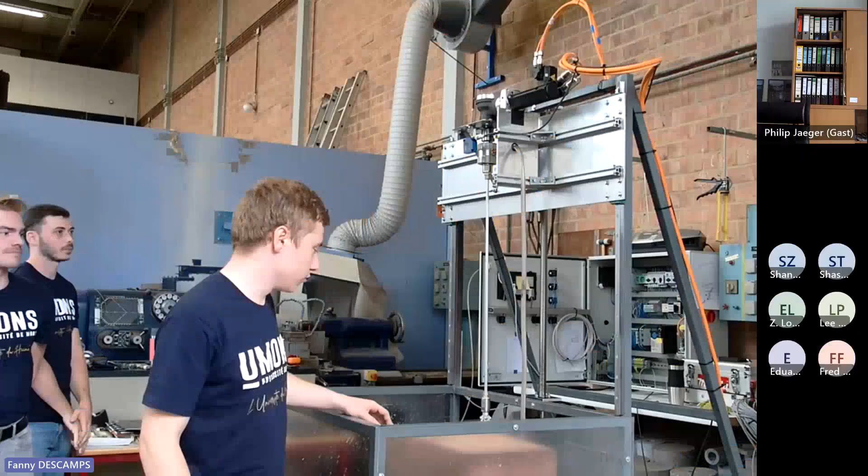Hello everybody, we will show you our rig. So we have the structure, it's in steel. Then we have here the rock. We use a tank for water. We work with saved water all the time.

We do this for saving the planet, and water is important for us, so we don't want to waste it. We reuse it with a pump that we can adjust to control how much water we put into the forage. Just here we have the swivel train with the tool, DDS, an enterprise in Belgium, in Charleroi, next to our university. Here we have the swivel for putting water into the rig.

Here we have the motor, we use a servo motor. Then we have the reductor, gearbox there, and it's the swing train for adjusting and going up or down. We have a ball screw, that we designed ourselves, and on the ball screw we have also our servo motor. We have two servo motors, so with them we can have all the information - the torque, speed of the tool, and other things.

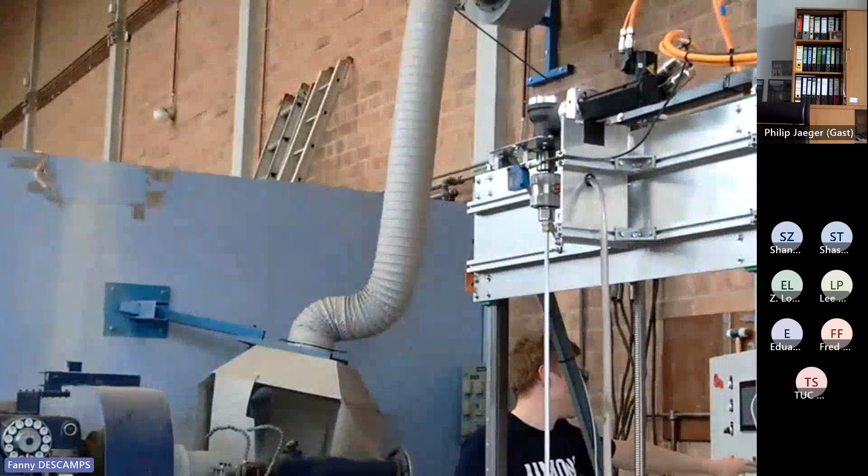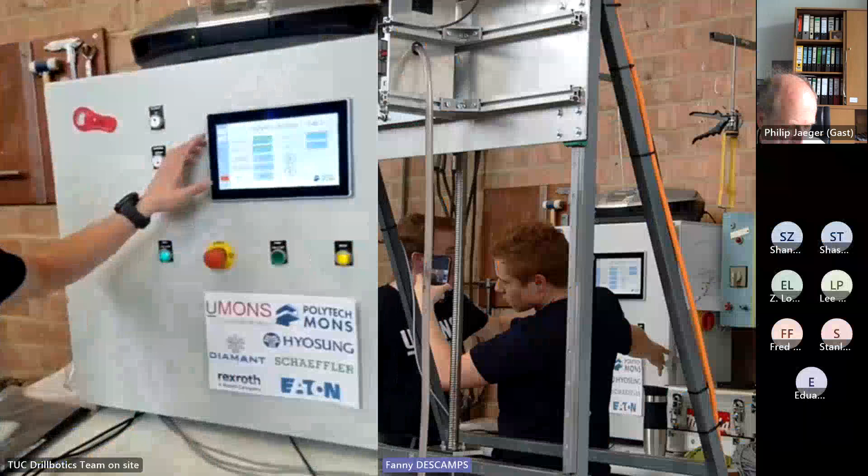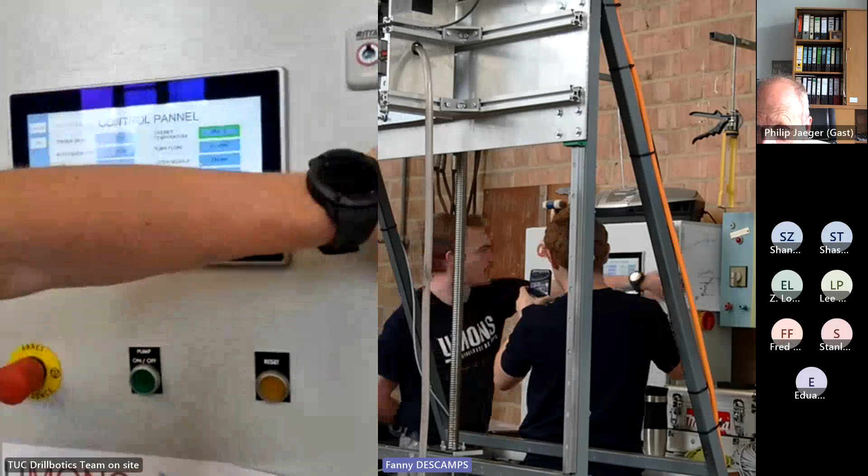We have taken some characteristic values between the ROP and the weight on bit. That permits us to optimize the regulation loop, which is PI.

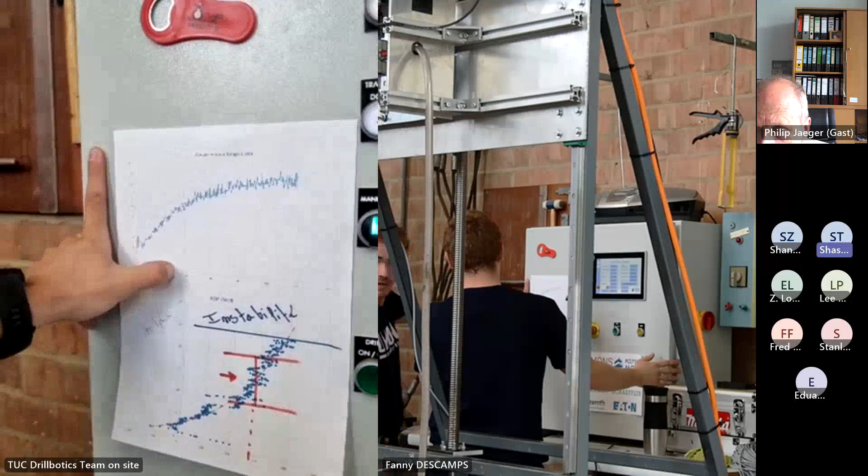On this sheet, we can see that we have chosen to use... One, Hey Martin, it's hard to hear you. Excuse me, you're a long way from the microphone. Maybe take the sheet to the microphone. Do I need to repeat a lot of things? What didn't you understand?

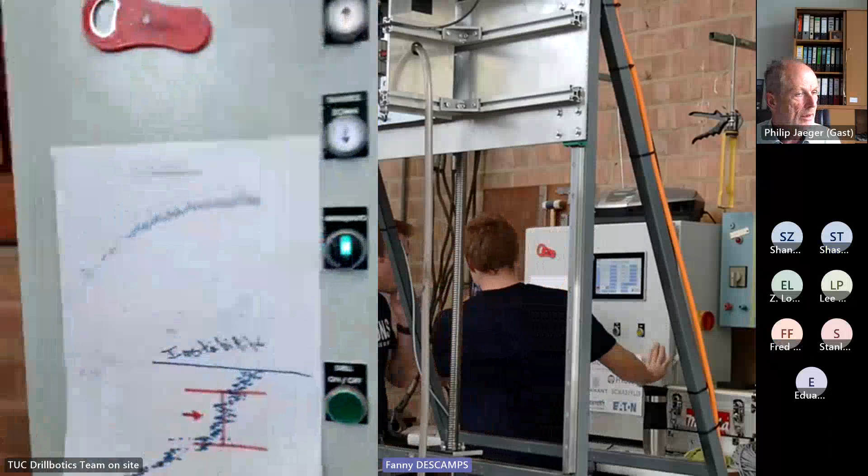We couldn't hear you. On the sheet, you will find some characteristic values that we have taken from a precedent drilling process, the characteristic between the ROP and the weight on bit, so we can see how to stay in a safety area, not to be unstable with the pipe.

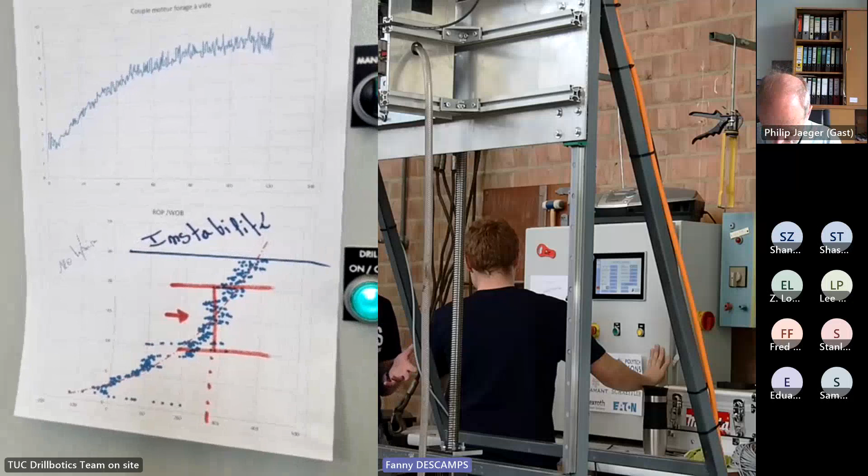We will set the ROP at 15 millimeters per minute. We can see here that this is the interval where we will work, and the PI regulation will try to command a precise weight on bit. So with this weight on bit, we will control the weight on bit by regulating the ROP. That's the way it works.

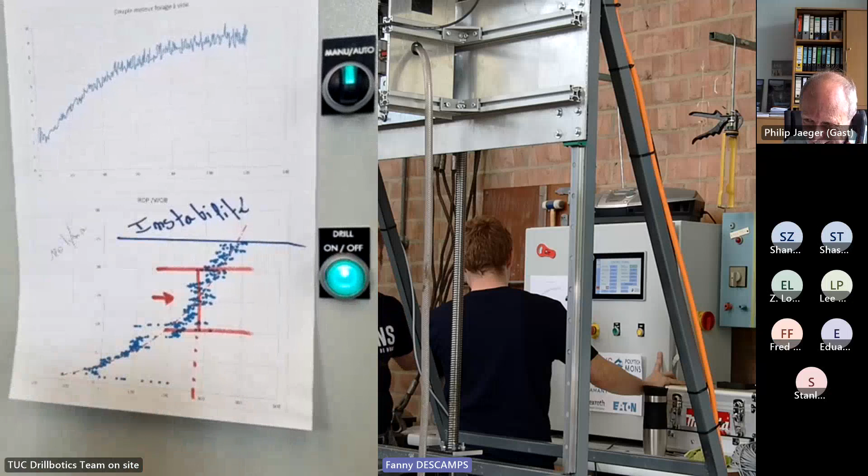And this is for a rotation speed of the bits of 120 RPM. We have chosen this speed because the PDC bits have been glued and not melted onto the bits, so we cannot rotate it too fast.

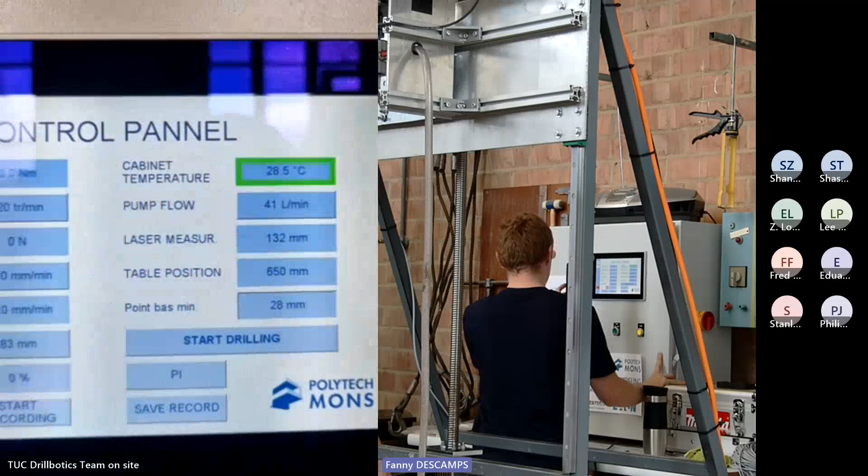Question: so you're holding RPM constant, but you're changing weight on bit to target the optimal ROP? Yes, the rotation speed is constant, and we are looking for a precise weight on bit by controlling the ROP. That's the way the regulation loop works. So it's an ROP control.

And how did you define instability, or how did you find that region? We found that region by empirical tests. We tested the bit, and with the pipe that we have, which is quite thin, we increased the ROP until it almost failed, so of course we stayed in a safety zone. We calculated some extreme values that we always stay behind, taking care of the safety of the user, but also of the motors present in the train.

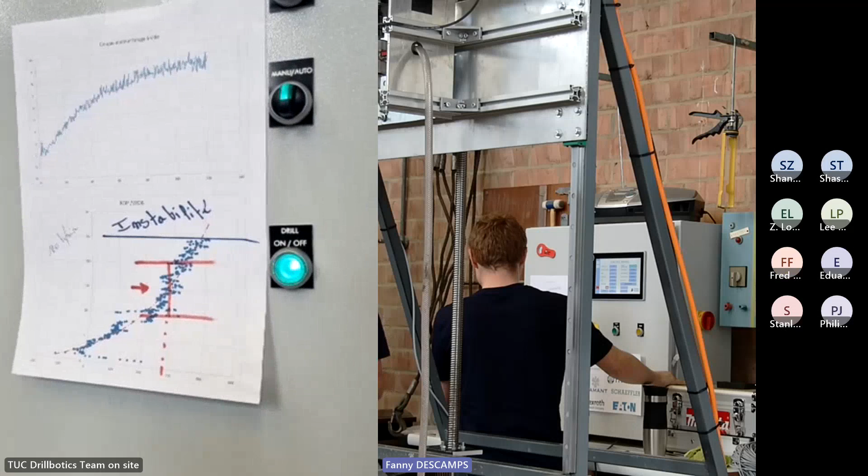With this experimentation, we have chosen this region to stay in. We could go faster, but we want to stay in a safety zone, so we don't want to go too fast and have problems.

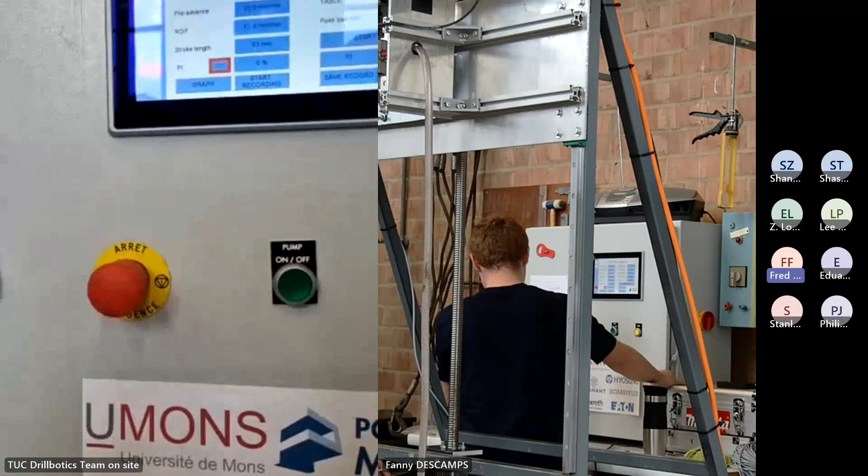I see that there's a red button on the front of the panel and a red switch on the side. What do they do? There's the red button, and when you push that button, what happens? It's the emergency button.

If you push it, the drilling motor stops and the hoisting system stops, but you're still able to move the hoisting system so you can take your bit out of the rock. This has been programmed in the PLC software. Does it disconnect the power? It disconnects the power of the motor, but not of the drive.

Since we can program the way we want the emergency button to work, we wanted to still be able to control the positioning of the bit, but not to be able to drill anymore.

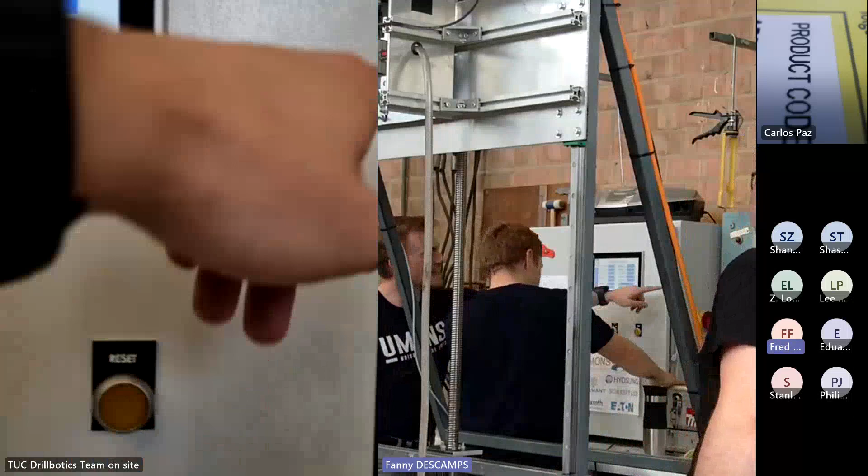And then on the side of the panel, is that switch a power switch? On the side of the electrical cabinet. Does that disconnect power? Yes, this is the switch for the power at the input of the electrical box. It is 400 volts, three-phased.

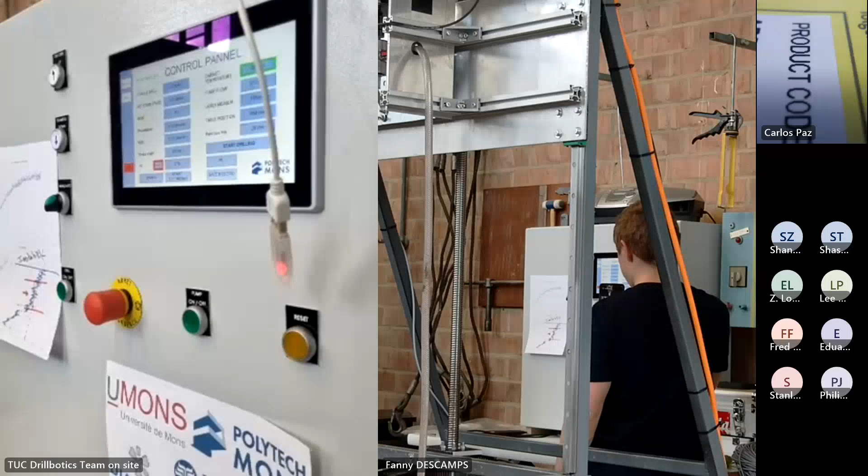Because the button on the front is not going to protect you from an electrical shock, if you had an electrical problem, the only place to turn it off is on the side of the box, not the front. Yes, of course, if we are still able to move the table, we can have an electrical shock. But the system has been sized for the safety of the user next to the rig, not next to the electrical cabinets.

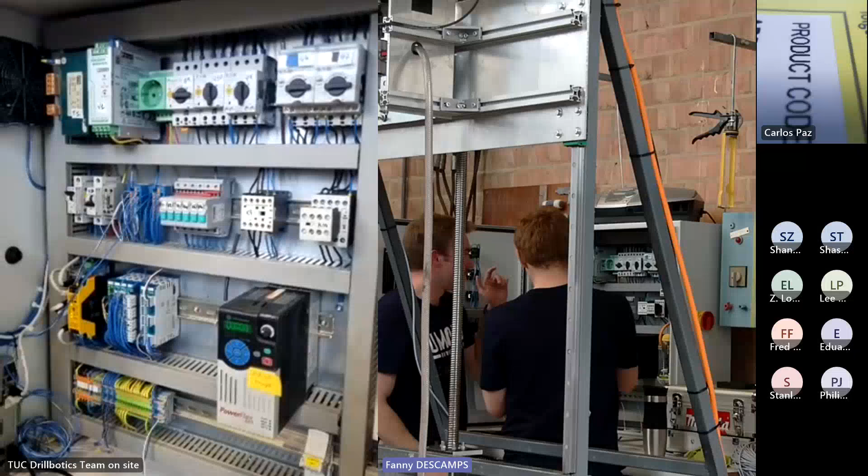If you have a ground fault, is there a ground fault interrupter? We have all kinds of software and hardware protection. Inside the electrical cabinet, you will see particularly some magnetothermal protection to the drives, to the motor and the pump drives.

Otherwise, there are some other kinds of protection. Are those PLCs on the right-hand side? On the right side, so these are the drives that control the motors. This is the drive that controls the pump.

Do you use a programmable logic controller, or do you just control it with the laptop? We run it with a PLC software. And the PLC software, where's the PLC itself? The PLC is the software, so we use Codesys software to program the drives.

So where is your algorithm running, your ROP control? The control algorithm for controlling the ROP and the weight on bit, where is that running? In the PLC, or do you have a laptop connected to it? Well, we can control it from our laptop, but we have a PLC, so we are not obligated to connect our laptop to control the rig. The system is made so that you can control the rig only by using the display on the front of the electrical cabinet.

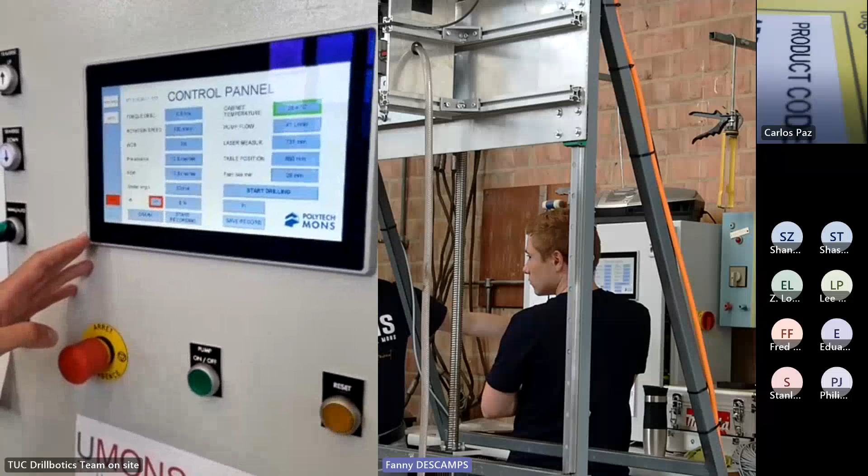A lot of the rigs now are moving to a remote control system, where you can control multiple rigs from a centralized location. Did you look at any ability to control this from a separate location, or does everything have to be controlled through this panel? We are able to control from a different site. We can connect with our computer with the proper material that we have, but we haven't installed it yet. But we could do that, yes.

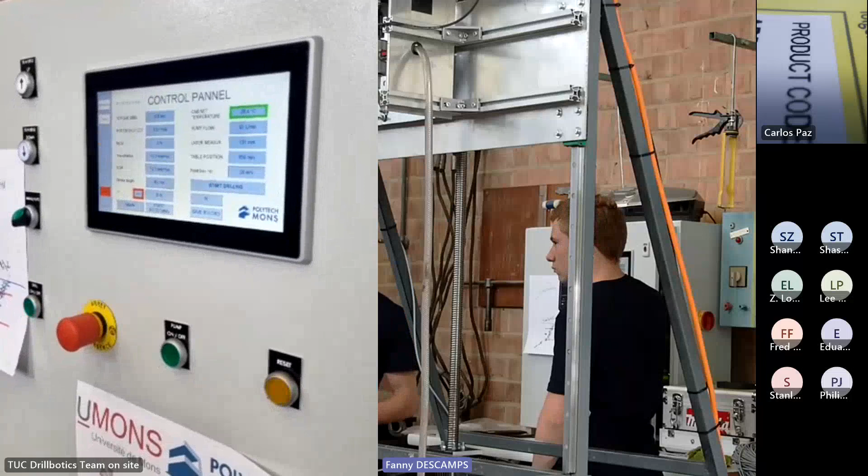Martin, can you talk about the BHA itself? What does the steering unit look like, the sensors? Well, remember this is the first year that we participate, and we haven't had time yet to create the steering system, so it's a straight drilling process.

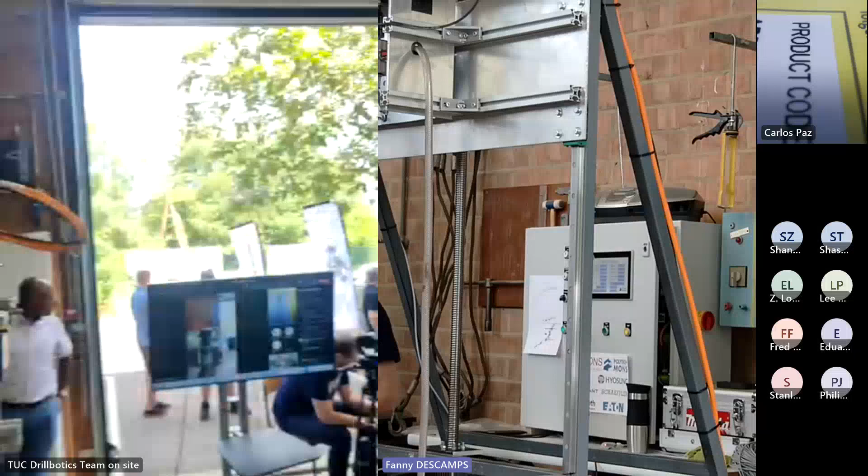About the sensors, we have chosen to use servo type motors to collect output information from these motors. This information gives us an indication of torque and rotation speed. For the hoisting system, we use the rotation speed of the motor to control the speed of the table going up or down, and the torque of this motor to know the weight on bit. Concerning the drilling motor, the rotation speed is direct information integrated to have a curve we can read on the display. We collect all information from these motors, and the torque of the drilling motor is also direct information from the motor.

A question: you mentioned torque is a direct measurement. Do you have a strain gauge, or are you measuring it from the current and calculating the torque? The servo motor works by collecting information from the voltage and current that goes through it. Well, of course it's a bit more complex than this, but typically yes.

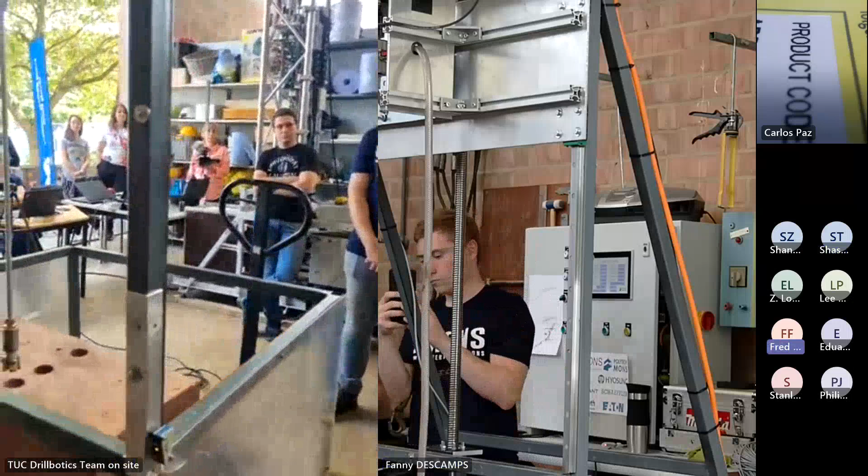What about any downhole sensor? On the torque measurement, is that coming from the servo motor and then you're calculating torque, or are you getting torque from the drive? Are you measuring the current and voltage at the servo motor and calculating torque, or are you getting an output from the drive itself that gives you a torque output?

It's the drive that controls the motor by collecting information, and we read these informations on the drive. Okay, got it, thank you.

Do you have any sensors in the BHA to measure inclination or azimuth or the position of the bit? No, we don't have sensors on the bit or on the BHA. All the information that we collect from the drilling process is from the motors. That's the reason why we have chosen to use servo motors, for the advantages of simplicity.

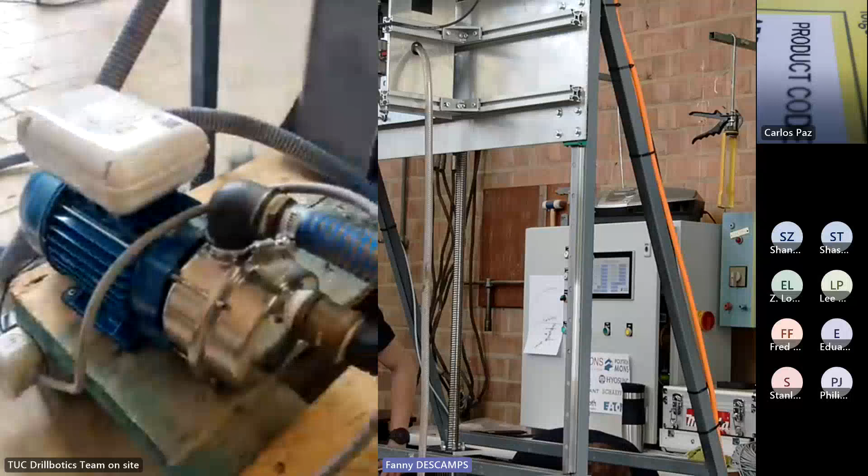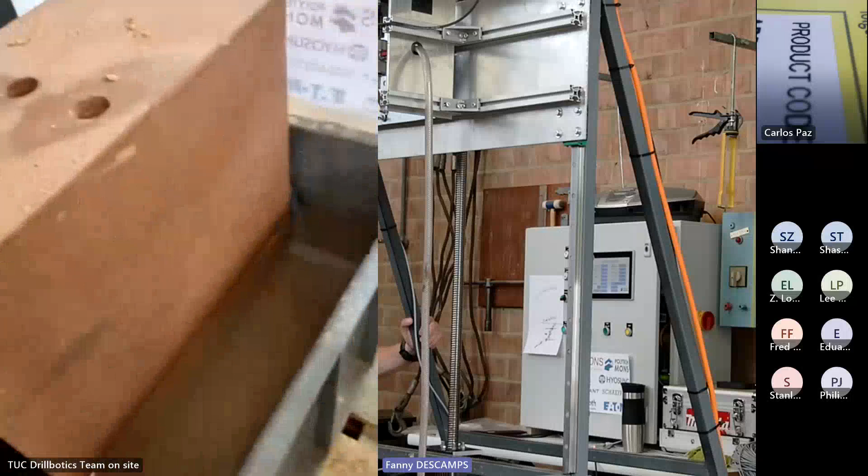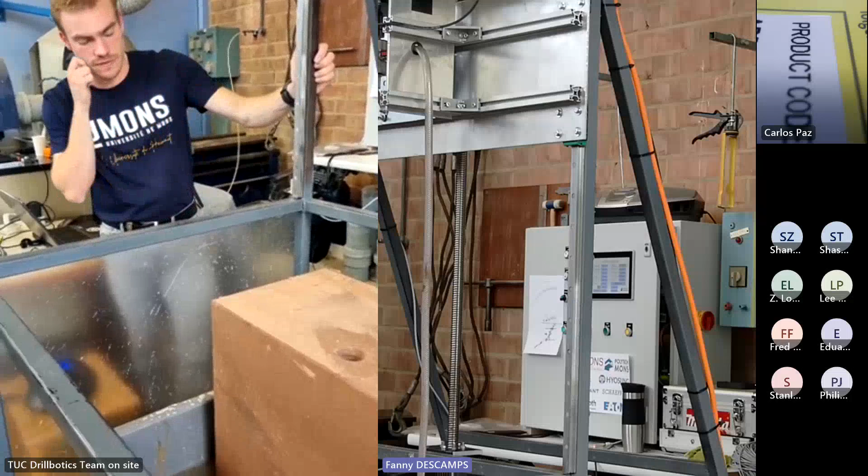Can you talk about the hydraulic loop? How is the fluid going to the bit? For the fluid, we use a flow regulated pump. So the pump drives the water through the system. It goes in the pipe, and the wastewater goes up in the hole, falls into the recipient in the batch, and there is a filter that we use to collect the wastewater, so there is no dirt that goes back into the pipe and into the process.

Can you show us the filter? Yeah, please, can you do that for me? Okay, all right, thanks.

I have no other questions. This looks good, team, for the first year. Looking forward to getting this thing running and seeing how it drills.

I'll pass it quick on to the other judges. Real quick - you said you don't have any sensors down in the BHA, no magnetometers, no accelerometers. How are you getting your survey position as you're drilling?

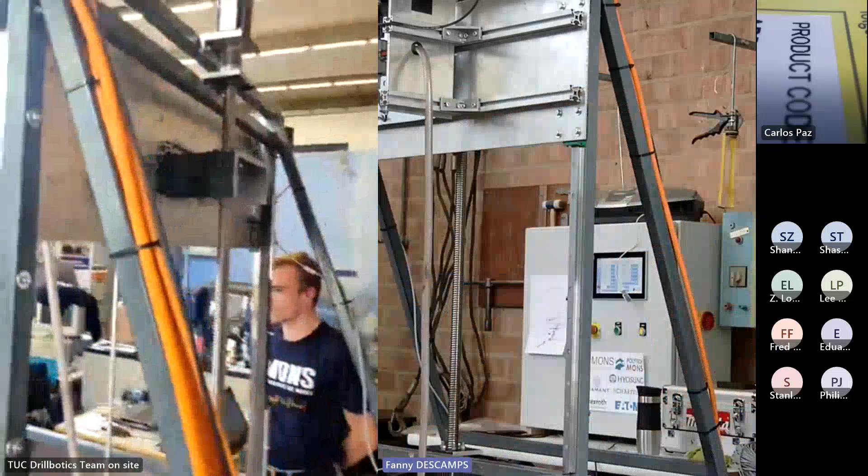By using the ball screw, because if you couple the ball screw with a known rotation speed and controllable rotation speed of the servo motor, you will be able to control the position of the bit inside the rock.

However, you have an error factor, because the pipe is flexible, and maybe we lose several millimeters by the bend of the pipe. It's not controllable for us - we can't know what this loss of distance is.

Okay, and then what's the survey frequency? I guess survey, quote unquote, frequency that you're taking - is it by the millimeter? Is it by the second? What's your positional survey frequency? I guess I would say...

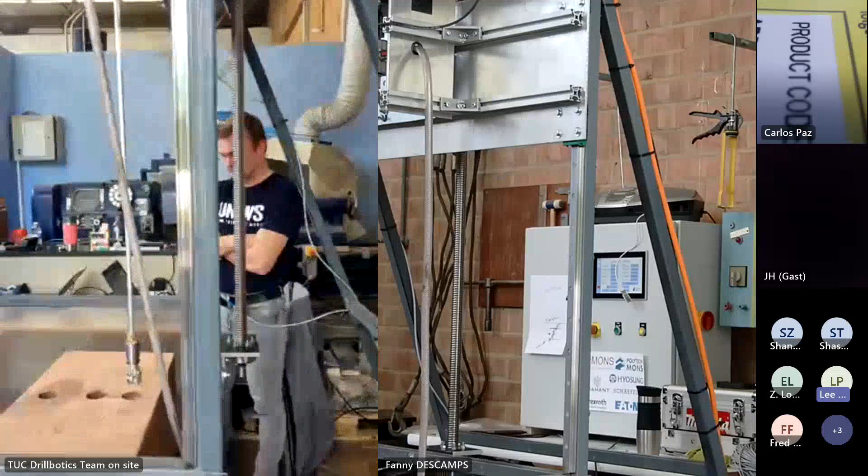Well, we take information real time. I need to check the documentation of the drives - I don't know it offhand.

Probably every couple seconds or something. No, it's faster than this. Okay, cool.

Regarding the twisting of the drill pipe, you mentioned that you use a titanium alloy to overcome the twisting problem of the drill pipe. Are you still using that, or did you change the drill pipe material, or what kind of adjustments do you make to prevent that?

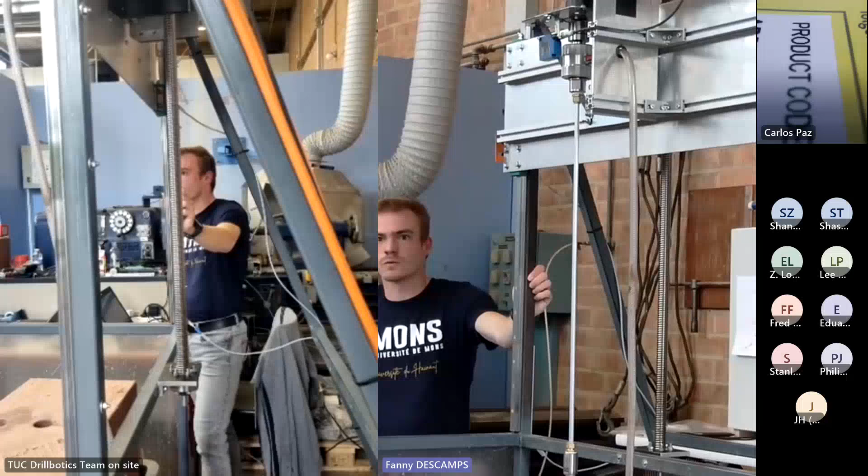We have sized the forces that are going to be applied on the bit, and we went with a standard of the pipe. The pipe has standardized dimensions, and then we calculated forces like the torque or the weight on bit that would be applied on the bit. We haven't yet changed the material of the pipe, but what we have done is put limits on the software to avoid these kinds of problems.

Got it, thanks. Regarding the testing you made to check the motor conditions, how do you measure the vertical and horizontal force? Can you walk us through that test? What kind of information do you want to have - how do you actually measure the vertical and horizontal forces on the motor when you estimated the parameters to implement in the software?

Yes, you mentioned there is an efficiency region of 450 to 500 newtons, and you also have the horizontal and vertical forces in there, and I just wanted to make sure I knew how you actually measure those forces.

Okay, so what we did is we made some tests on another bench test. We calculated forces that were applied on the cutter. Then we put a high security factor to be sure that the speed of the test wouldn't be a problem - a problem of converting these values from a low speed test to a high speed test, which is the drilling process that we have here.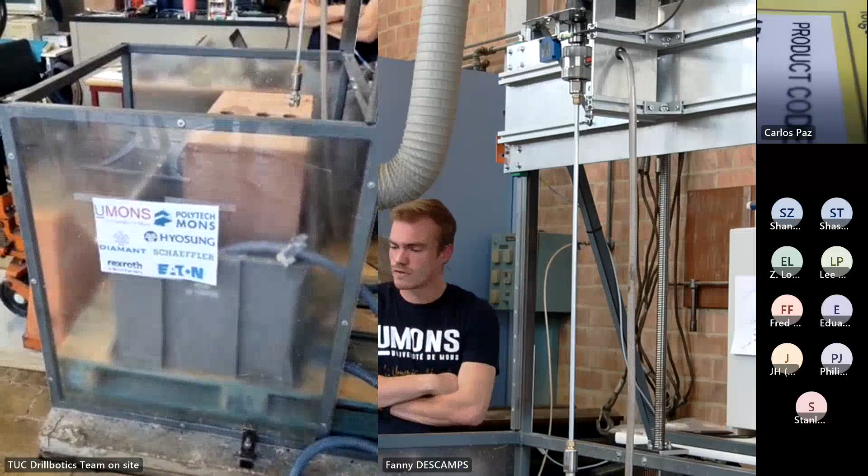Concerning the plexiglass plates, well, we put the plexiglass plates for the bit projections and the water or wasted water projections. And with the pump flow that we are able to provide, it won't be a problem for this kind of projectile or projection.

Beyond this, of course, we have that kind of a bit - comment on dit en anglais? Excuse me.

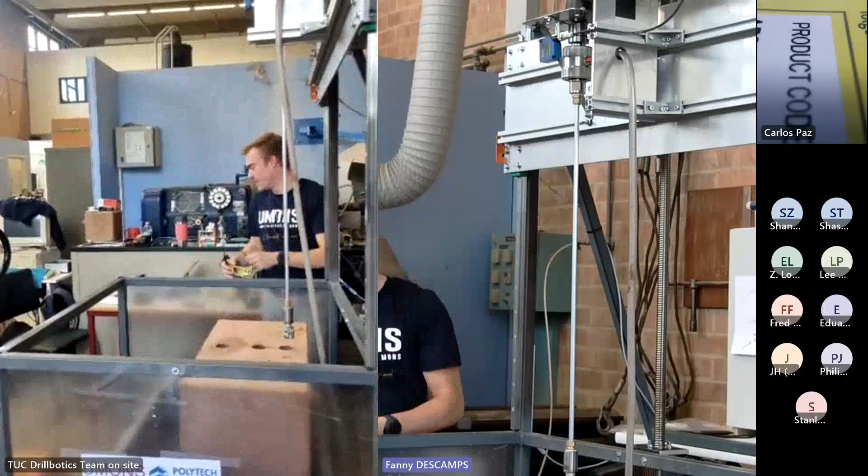Goggles, okay sorry. So for the user we have goggles, that we don't have on us right now, but we will use them for our safety, which is the priority, of course, with the use of that kind of experimental machine.

But I'm more concerned about something that breaks and hits you like a bullet. You need to extend the plexiglass into the derrick as well as above, just around the rock. As you make improvements for next year, you need to enclose the derrick in some kind of shield. It can, it should be removable, of course, but you should have something there for safety.

Actually, the protections are in the software, we have limited... No, if something breaks, it's a bullet, and the software can't respond fast enough. We've seen it happen. Oh, okay, it's noted, thank you.

The other thing is in your hoist mechanism, there's a drive screw, and as you rig up and rig down, there's a lot of weight that's being held there, and you probably need either a pin or a bolt or something that you can put in that and lock that carriage into the frame, so that while you're working on that drive screw, that piece can't fall down and cut your hand off.

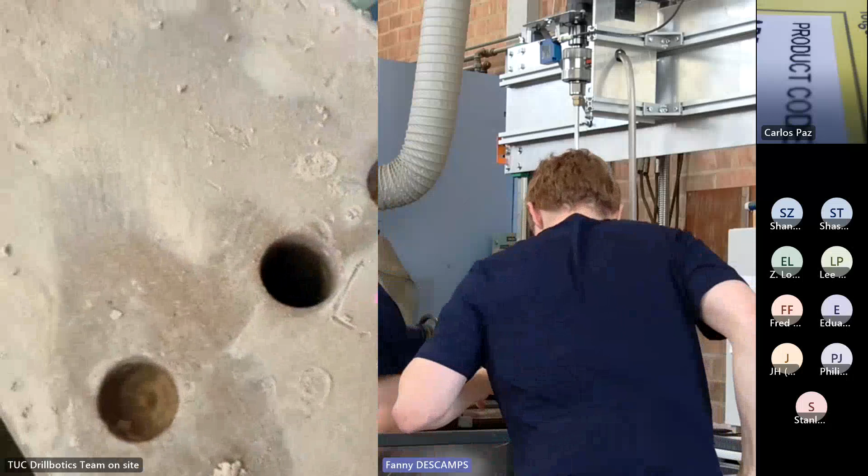Have you looked inside the hole? Is it smooth or is it spiral? Pretty smooth, yeah, they look very smooth. That's good. We only have on this part half a millimeter that's bigger than the tube - over gauge. Okay, that's fine, half a millimeter is about 1/50 of an inch.

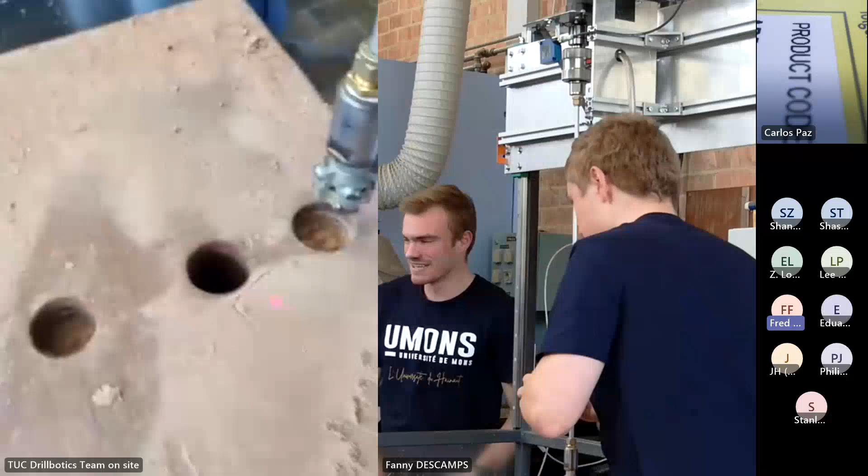I'll send you some photos of some spiral. That's very good, it's very good what you're doing there. That's all I have. Well, thank you then.

All right, we'll switch gears and move over to TUC's rig. We have another camera set up on the phone. I will not talk so long, I will just hand over to my colleague Ali - I'll take the phone. I think you can explain best the main setup. Let me just step to the side. All right, so you there - can you see it? Down there. Okay, I see it, good.

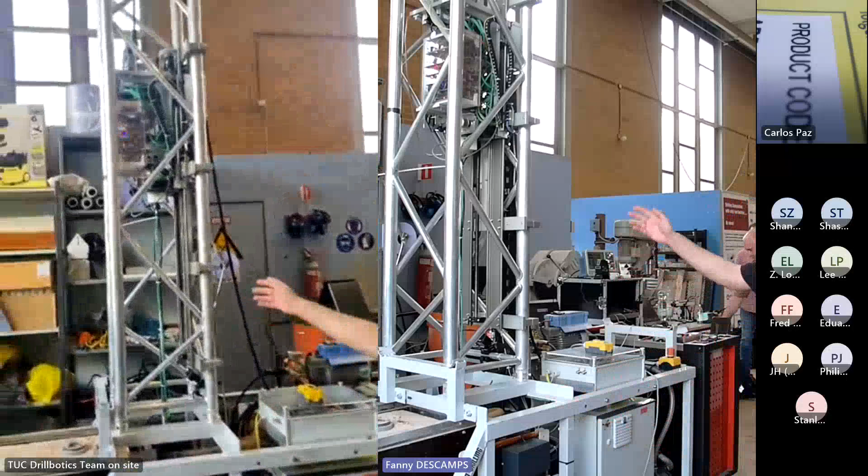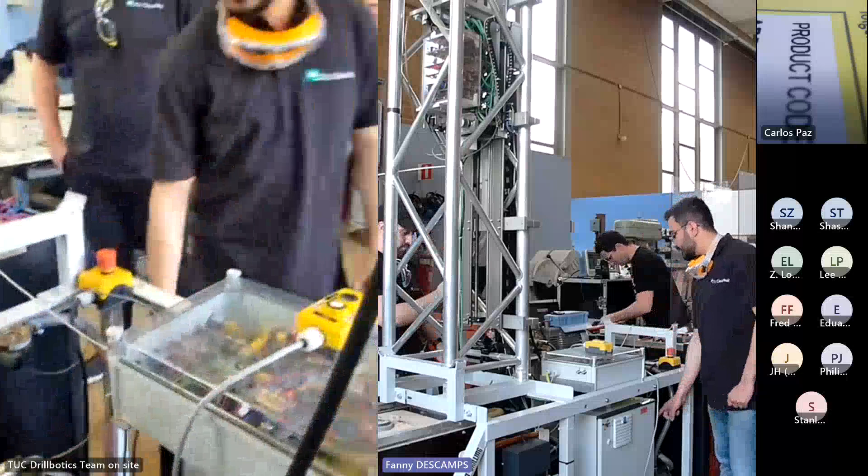So this is our setup here. We have, of course, 3 main components like every drilling rig could have - we need rotation, we need weight on bit, we need circulation. Starting with our circulation system, we have our rock sample receiver, which is also our reservoir for our drilling fluid, water. That's where the water is. Then our rock sample receiver is connected to a tank system - we have our filter tank where we filter the cuttings out of the drilling fluid, and then it goes to a buffer tank, a smaller tank in the back. This buffer tank is connected to a pre-charge pump, so we have a 2-pump system - a centrifugal pre-charge pump and a positive displacement high pressure pump, where both of them we can achieve around 8 bars or 9 liters per minute.

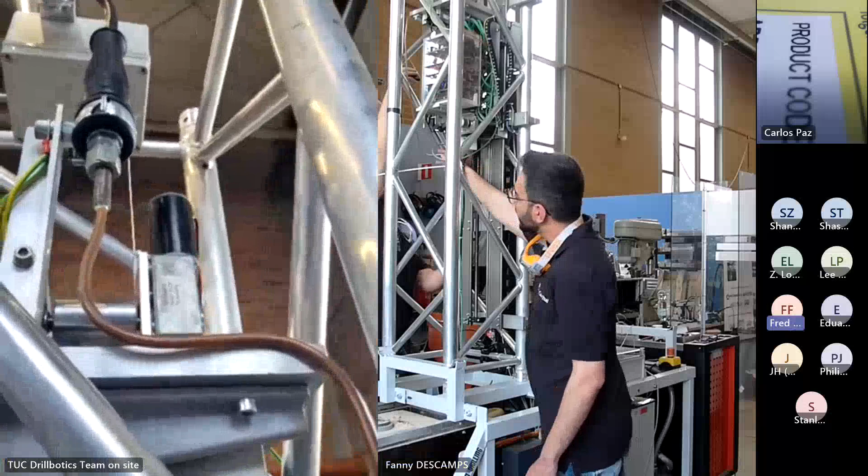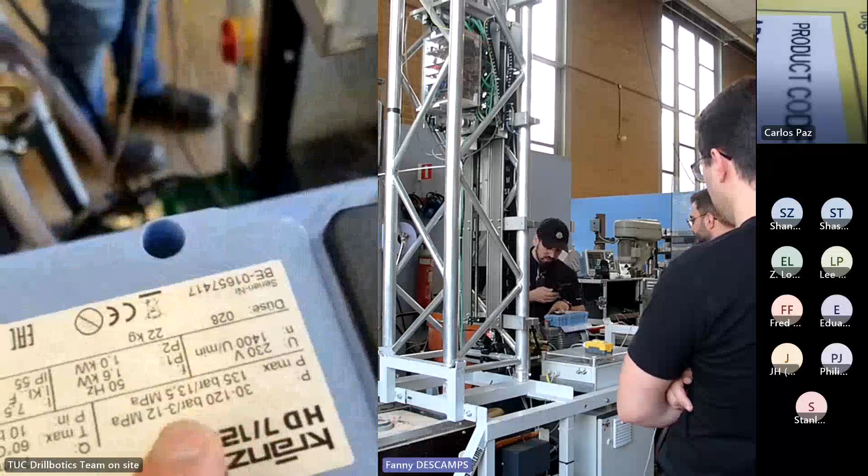Then it's connected to our release tank through an external copper line, and it's connected directly to our BHA. You say you have a high pressure pump - what is the pressure? With the pre-charge pump we only get about 2 bars, and then with the additional pressure from the high pressure pump, we get around 8 bars at the end. Usually the pump is capable of doing more, but since we have a very big diameter in the drill pipe and the copper tubing, we cannot reach the bar that's labeled on it - it says 30 to 120 bars, but even if we open the choke fully, it's 8 bars constant.

If you have a leak, you never look for a leak with your fingers. If you check with a high pressure pump, at 8 bar it might not hurt you, but at 100 bar it will - it'll saw your finger off. Never, ever check for a leak with your fingers.

That's a good point - this is also why we made a crucial decision this year to replace our hydraulic system. Last year we were operating with a hydraulic system. Lana will later tell you what we changed, and the safety factor was hugely important.

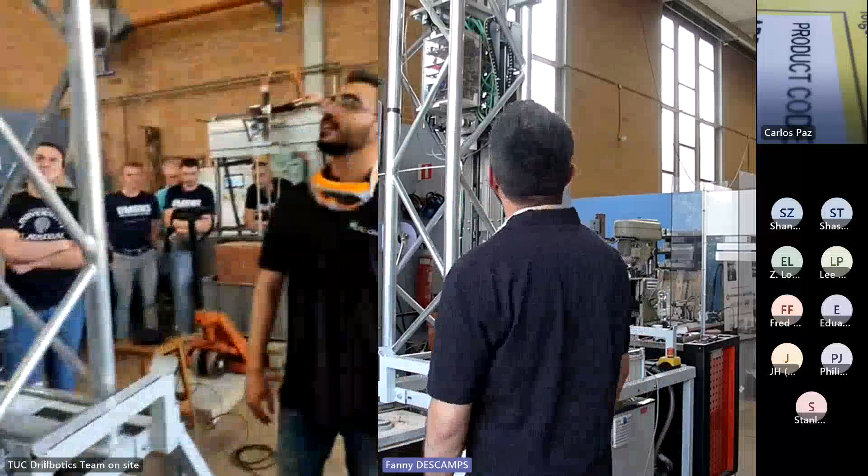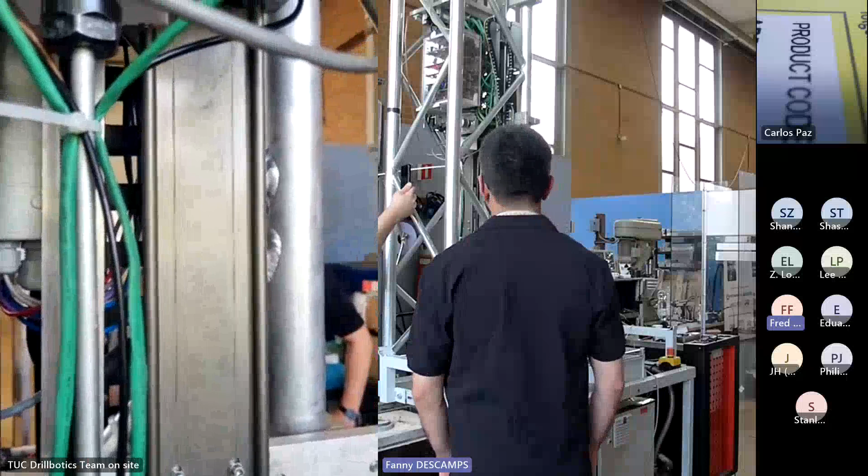Okay, good, so I'll move over to the other two systems briefly. We have our hoisting system, which is track-mounted, electric driven - it's all with the top drive, and this is how we provide weight on bit. This brings me to our rotation system, which is an electrical self-mounted top drive, connected through a flexible shaft inside a static drill pipe. That's how we move the rotational energy from the motor directly to our drilling bit, so our BHA kind of stays static - which brings me to the next point, we also have a rotary table.

We only use this to help us with the steering system, to orient, calibrate, and help with the azimuth. Yesterday we did the measurements using the rotary table to map the output of our magnetometer downhole. The rotary table gives us the exact output of our current angle, like a big table where the magnetometer output is matched to the corresponding angle. Later we can use this mapping during the drilling process to interpret the data we report.

With the cylinders connected to the wings on the RSS, do you still use the rotary table? No, the rotary table is used only for calibration purposes. We orient the wings in the beginning, and after that we're purely steering with our RSS system, although I wouldn't call it an RSS system since the BHA itself is static. Maybe this is a good point for Kanan to explain what he did there.

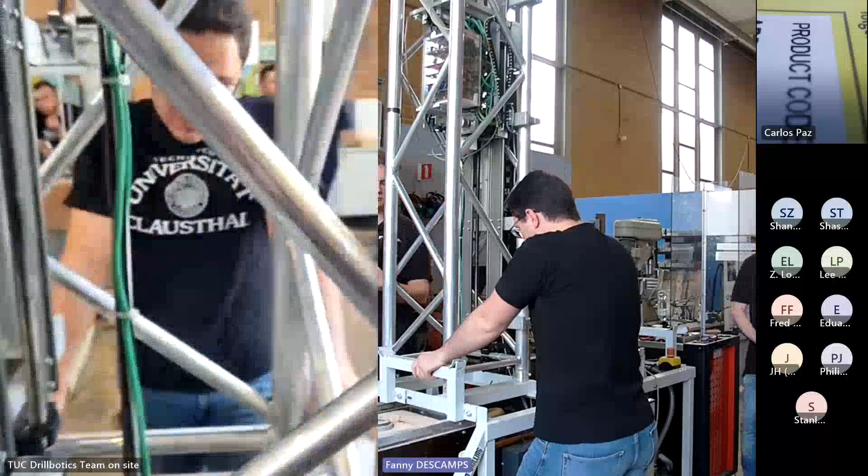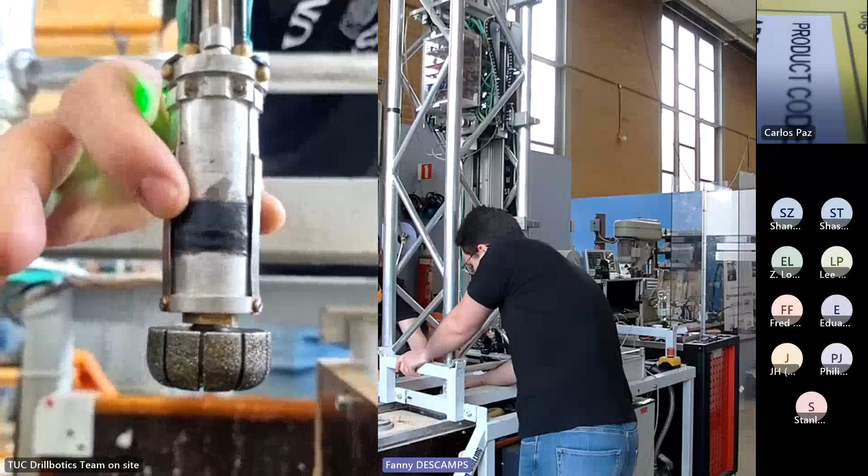My part this year was to redesign the BHA using the data we had from last year, and to construct a steering mechanism. Starting with the BHA: last year we had a fairly longer BHA. This year we reduced the length down to 74 millimeters, down by 50% from last year. We did that to make it easier for the BHA to steer. Another aspect is the outer diameter of the BHA - when we make it smaller, we can steer more tightly and easily. We reduced this diameter by 5 millimeters, from 33 to 28.

We've tried to get the contact points between the wings and the hole a little further down, so we have more mechanical advantage when pushing on the inner wall of the hole. Here we have a pair of strain gauges to measure our weight on bit. This is our IMU - down there we have a magnetometer and an accelerometer to measure our inclination and azimuth.

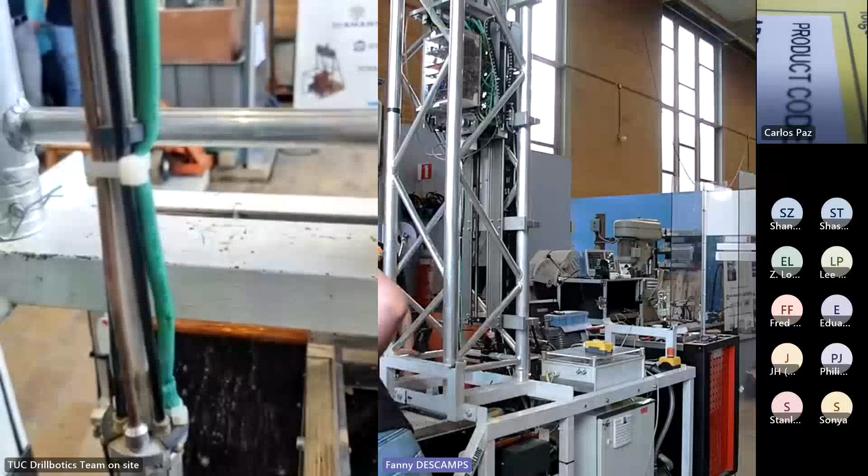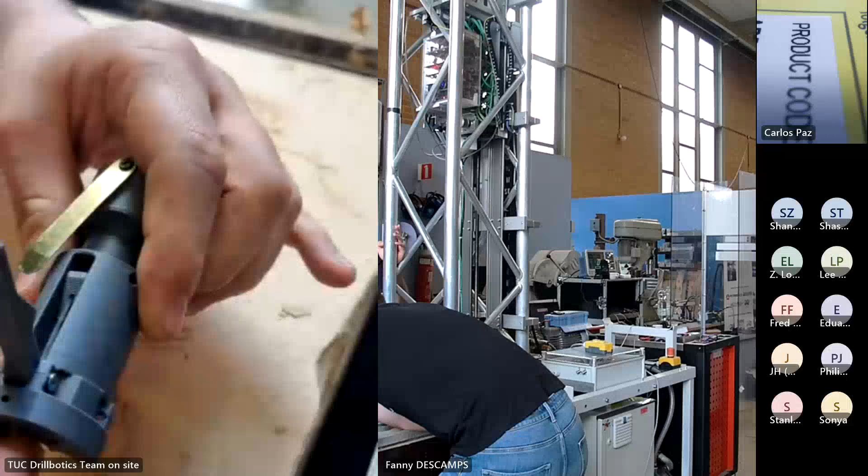Now we have a static drill pipe with 3 power cables. This is our new steering mechanism, and I'll show you a 3D printed model of this BHA. We have our wings right there, and a wedge under the wing - it's a little difficult to get out. This is our wedge, and we have a nose on the wing. This cable is connected to the wedge, so when we pull on this string, we can deploy our wings.

And there we have a sheet metal spring to push the wing down when we retract the wedge. That's our steering mechanism for this year - last year we had a hydraulic system. The wires you're pulling from the surface, is that right? Yeah, we have a pulley on the surface. I'll get to the steering unit.

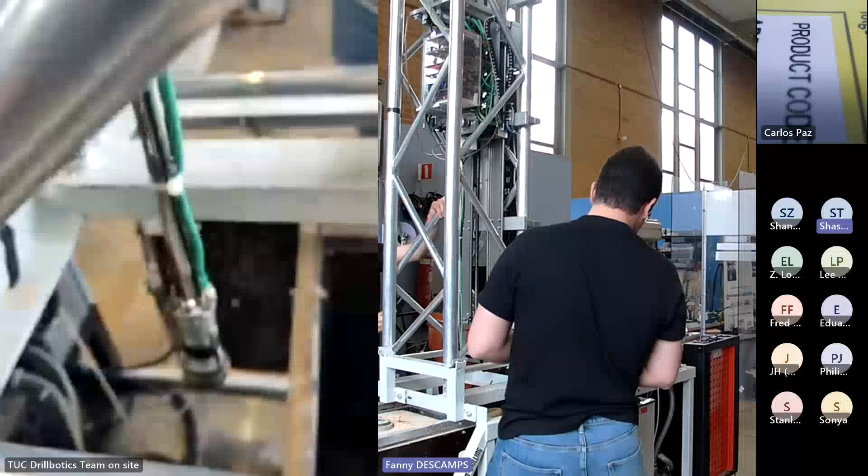Maybe a few more questions on the steering unit before you move on. How were you able to reduce the length? You said this year you reduced it by quite a bit compared to last year - the BHA length.

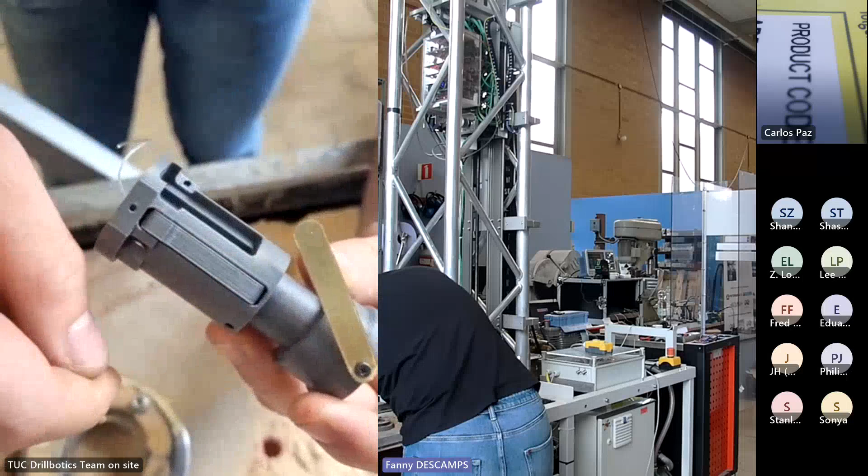We just redesigned the BHA. There were some places in the BHA that we didn't need, so we got rid of them. We reduced the distances between each unit, so the wings are now a little shorter, and you see it's very close to the place where we have our strain gauges. Last year we had more room between the tip of the wing and the strain gauges, but we don't really need that distance, so we eliminated it. For the ball bearings, we reduced the size - now we have one big ball bearing and one smaller, which is fully sufficient for our weight on bit.

The IMU we also got smaller, thanks to Wolfgang. We just reduced the distances we don't need. Last year the BHA was made of 2 parts, with a nut between them to combine them. Now we've made this BHA of 1 part of aluminum, which saved us a lot of space.

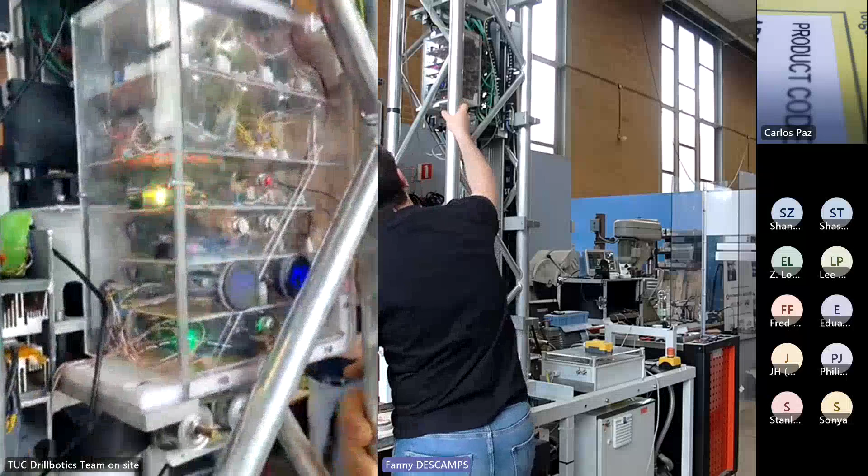Oh yeah, for the BHA IMU, do you also make your own PCB? Very small - when it's very small, we can't manufacture it ourselves. So we send it to a service to print it for us because it's very tiny, and we can't manufacture it ourselves. But we have designed it ourselves, and not only the design, but also the SMD assembly. This is the new IMU. So it's only printed by an external service - we have designed it and assembled it ourselves.

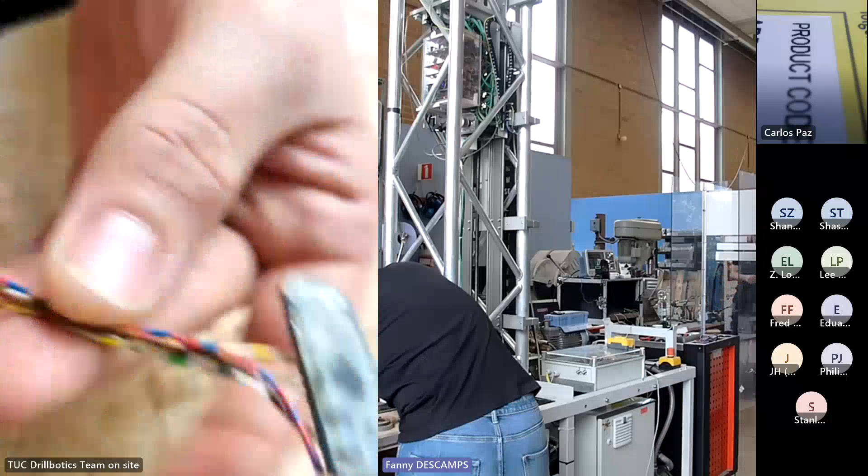All the parts we have soldered ourselves, and this is now coated with resin to protect it inside the hole while drilling. Those are the cables going to the PCB on the adapter board - it's like a connection board.

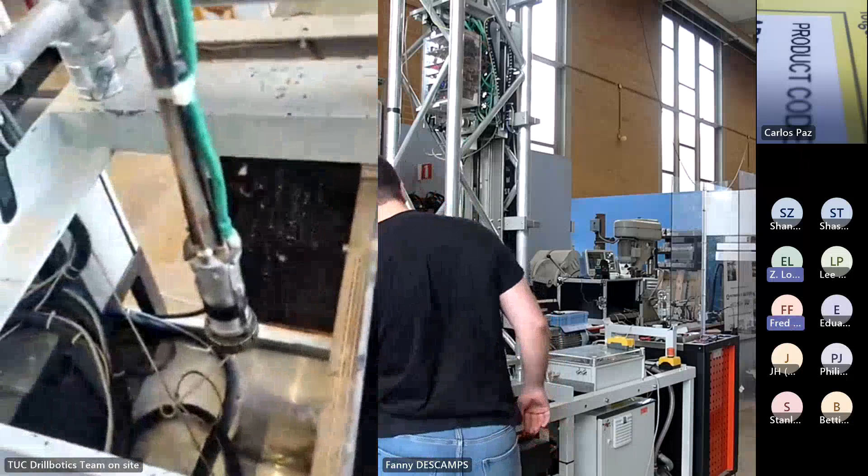Very nice, very nice. Thank you. What killed them? When you say they didn't survive, what killed them? Water? No, so actually...

Soldering with SMD components - they're so small, and the company gave us a stencil so we could place the parts. But even with a tiny short circuit, some components can break, and if they're broken, it's very difficult to replace them by hand. So 3 IMUs survived the soldering part, and 2 then died during resin application, because the resin got hot and shrank a little bit, pulling some components out of the PCB. Once it was inside the resin, we had no chance of getting inside it.

How do you handle vibrations and errors from having electronics on top of the drilling hoisting system? Yes, for sure - we can't measure inclination while drilling. The accelerometer is very sensitive to vibrations, that's why we planned our surveys so we shortly stop the drilling process and then take the measurements. For the magnetometer, this actually works perfectly - it's like a textbook example when we take data from it.

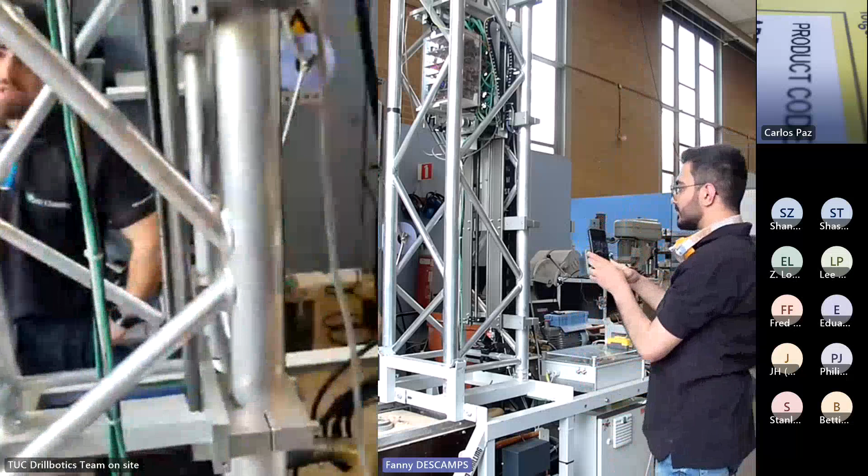What's the difference between measured depth and true vertical depth? True vertical depth is how deep you are in the rock. The measured depth would actually be our drill pipe length, because when we are deviating, hopefully we will, the true vertical depth is going to be smaller than the measured depth, since we have an inclination.

I think we'll take over and tell you about the steering. Ali, you want to move that?

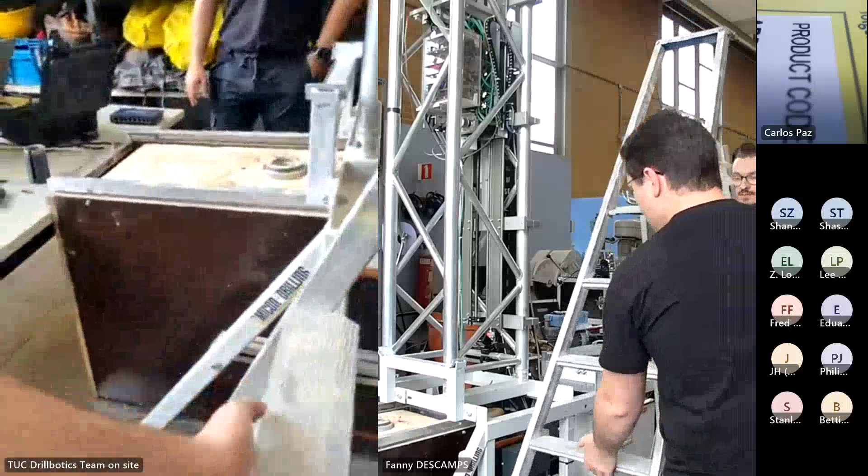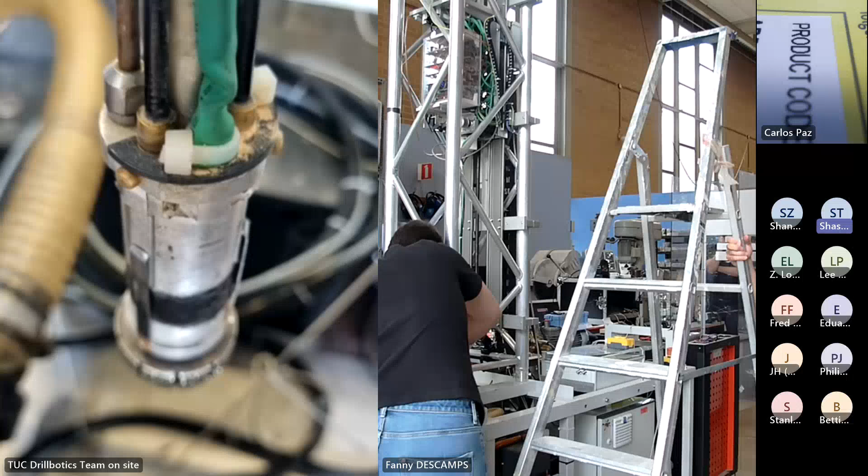I have one more question on the BHA. So your bit is your first point of contact, then you have your wings or the pad, that's the second point. Where's the third point, at the top of the BHA? Is that right? The third point is the stabilizer, we have three points on the stabilizer, so this is our third contact point. So when you said you reduce the length of the BHA, that means you now have a higher dogleg capability? A higher build rate capability, right? Yeah, okay.

So those are the cables from the IMU and the strain gauges, and then we have three Bowden cables. Those go to the steering unit. Those are the steel cables inside the Bowden cables. They are pulled by a pulley, which is driven by a DC motor, and on the other side we have a rotary encoder to measure the position, and in combination we have a servo motor, so we can exactly deploy and retract the wings on the BHA.

Exactly. We want to show you how the wings are deployed and retracted. My colleague is going to send a command to deploy the wings. Take pictures of the robot. Maybe just hold the camera from the outside. Yeah, good.

Was this the maximal? No, it's 50%, this was just 50% of our maximal. Which wing is that? It's wing two. Wing two, okay. Then wing two to 80%. Exactly. So now we can deploy it.

Do you have an interference problem with the magnetometers there? You have to repeat that, please. Do you have a problem of interference with the magnetometers of the sensors? Magnetic interference, I don't think so. All our parts are made of aluminum, so we don't have interference with the magnetometer.

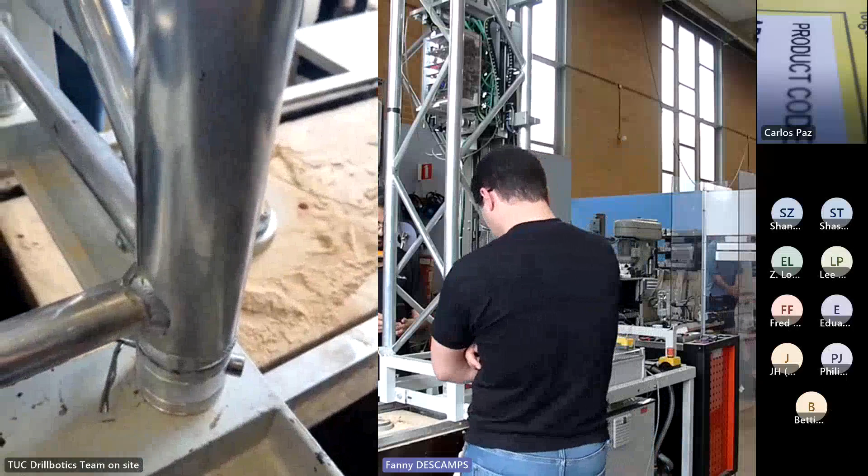So in every survey, you check for the interference then for quality control of the survey, right? No, actually how we interpret the measured data is, in the beginning when we calibrate the sensors, we map a certain range of angles. We basically look for the output of the sensor and give it the current angle. So for the azimuth, we rotated the BHA by 1 degree and measured or took the data, and then we knew this data point corresponds to this angle. The same for the inclination.

This is some, I mean you could already call it machine learning, but it's just interpolating the data between two angles as a line. So even if we have slight deviations in the measured data during the drilling process, it will still be somewhat accurate. So obviously it's not precise, not extremely precise, but for the azimuth, we had measured outside and did the calibration, and measured in the hole, and we had a deviation of 4 to 5 degrees.

For the inclination, it's a little bit harder because the accelerometer is very sensible, so there we had close to 7 to 8 degrees deviation from the actual inclination.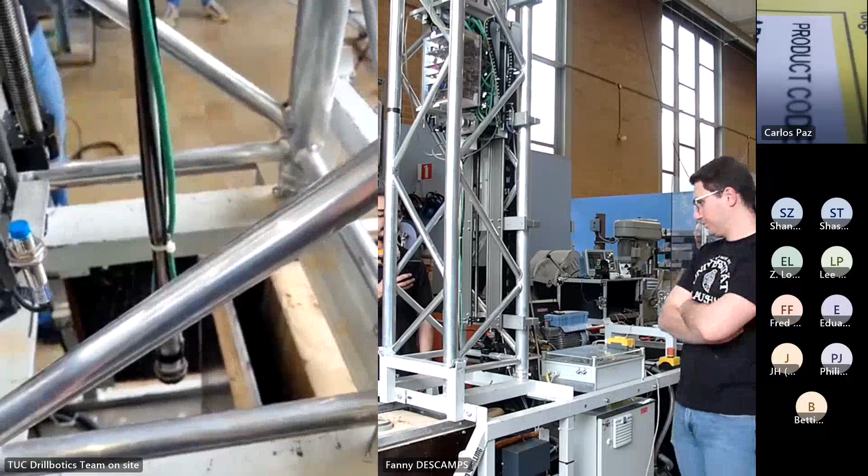But do you have any way to do a quality control of the survey in case, for example, somebody came with a watch or whatever that causes interference? Do you have any way to realize there is a problem in the survey? So basically we have a way: when we do a survey, the drilling process has a feedback loop that asks the IMU frequently to post a statement. We request the data, and if the IMU is not responding we ask again until it sends it, until an error state is reached, and from there most likely the IMU has given up. Our plan B would then be to proceed with drilling, assuming that our planned survey point is our current survey point, so that we can still drill in a somewhat decent direction. Let's say it like this.

Did you try to use MEMS gyros as a sensor? No, we didn't use gyros. We can think of implementing it, but the simpler approach for us was going with one accelerometer and one magnetometer.

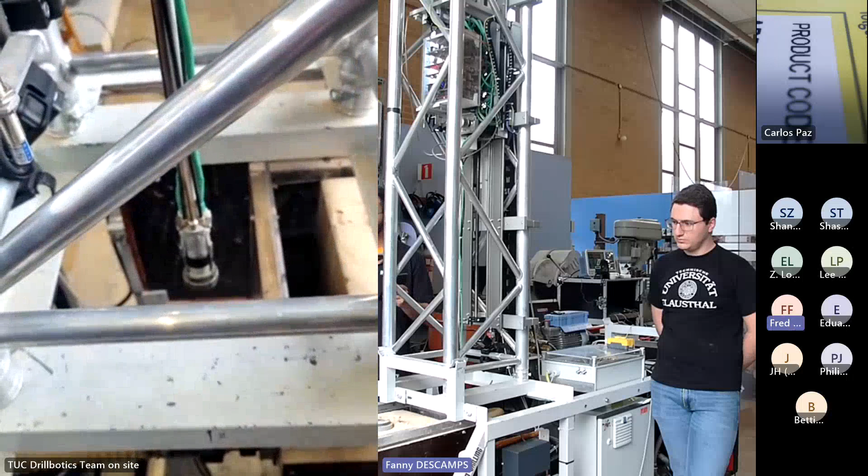Are you orienting towards magnetic north, or how are you getting a reference for your azimuth measurements? Our magnetic north is pointing in this direction, since we're generating our own magnetic field. We subtract 90 degrees from that to get our actual 0-degree position, and this is also the line in which the first patch should align. We do this with a laser calibration instrument, and from there the position of the BHA or downhole tool is fixed, and that's where we start running. So your sandstone there is oriented directly to your own magnetic north? Right.

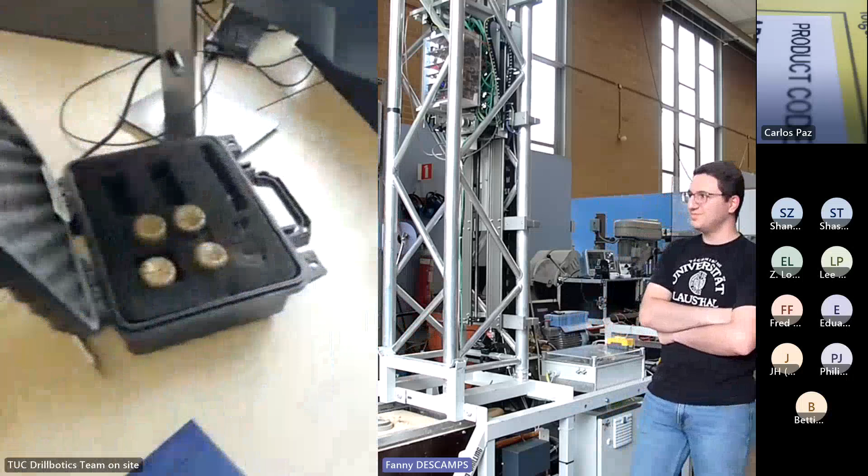Very cool. Okay. Yeah, I mean, Kanan, do you have something to add? Otherwise I would go through the GUI and a little bit of the algorithm real quick. I think that was it. Yeah, we actually understood. Okay, here's perfect. Okay, let's maybe have a speech. Oh yeah, of course.

Since last year, we had a little bit of a problem with our old drill bit. Nikon Drilling was very nice to help us design a new drill bit, which was also manufactured by them. The design was made by me together with two drilling engineers from Nikon. They helped us very much, telling us all about the specifications a drill bit should have and what we should use.

Just to mention some things, the gauge side is actually not 90 degrees but a little bit tilted, just to reduce friction on the gauge side. We also implemented a cone angle, but it's very slight, which should help the drill bit stabilize itself. Last year's drill bit had a round shape, so the cutting velocity as you move to the center of the drill bit was becoming zero. So we didn't really have a drill bit, we had a spinner, and the BHA was tangling on the rock like this.

But with this bit, we had a major improvement of the drill string stability and also in the rate of penetration. During an accidental test, we reached, I think it was 1.7 millimeters per second. Wow.

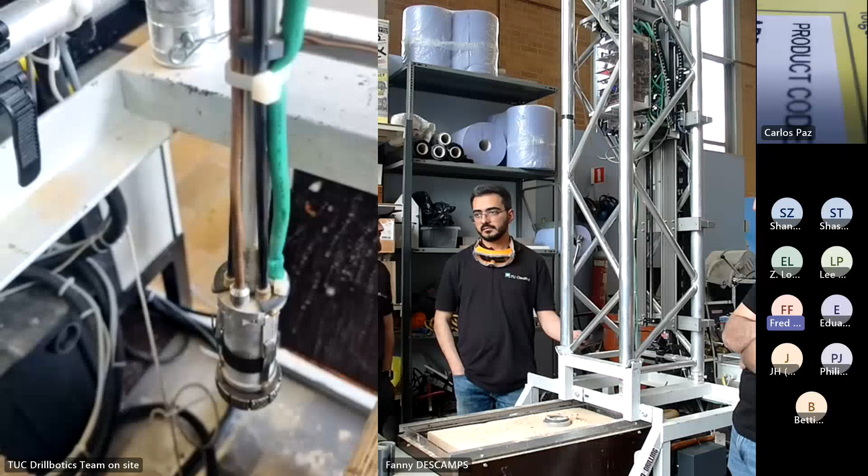So is it a digital sensor or an analog one? Good question. The accelerometer is analog, I guess, but sorry - MEMS sensor. And the magnetometer is also a MEMS sensor.

But to communicate the measurements, are you using a digital bus of some kind, or just taking raw voltages and converting them to actual values? I didn't understand the question. Are you using a digital bus or digital communication, like I2C or CAN bus, or are you only reading output voltages? CAN bus - all modules that you see on the rig are connected via CAN bus, including the downhole sensor. You have a CAN bus in the downhole sensor, or is it raw voltage coming off the board? No, we have a CAN transceiver inside, on top of the IMU, which sends the CAN messages already from downhole. Okay, so the IMU is sending a digital signal. Okay, that's good to know. Got it, thanks.

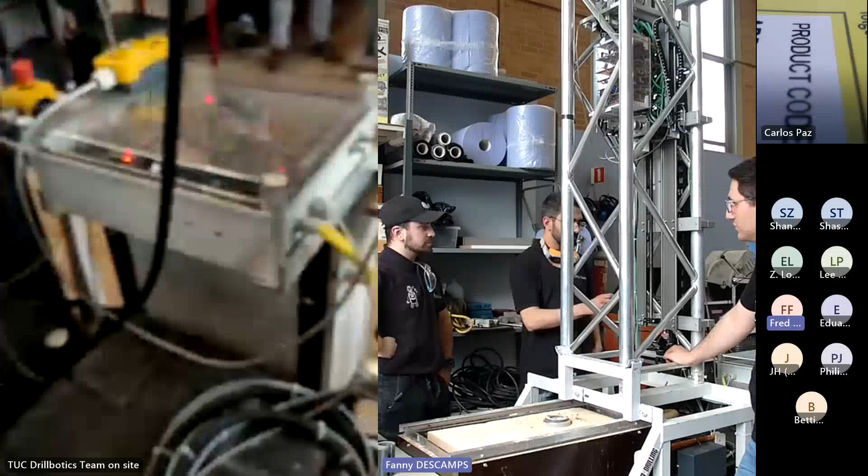So we don't have to have a long talk about interference, but I swear it was one of the biggest problems that we had. The CAN bus was packed full with noise, and we had to come up with very fancy filters to...

...somewhat keep the noise out of the CAN bus. In the end, we decided to split all voltage supplies from the main cabinet, so the motor has its own voltage supply. The 5 volts are independent, and also the 24 volts. And we ended up with, what is Netzteil called in English? Yeah, with 4 power supplies inside of our main cabinet.

They're all below 50 volts, so it's safe. It's German standards, Kleinspannung. They're safe to operate, so nothing that you see here can be deadly when touched for milliseconds. But even...

...if there's some wire hanging out and you touch it, we have FI switches that will cut off the power supply. We have 2 emergency switches: one is over here beside the rig, and one is right on the table here, basically where the driller console is. So the driller can also, if he notices something, just press the button.

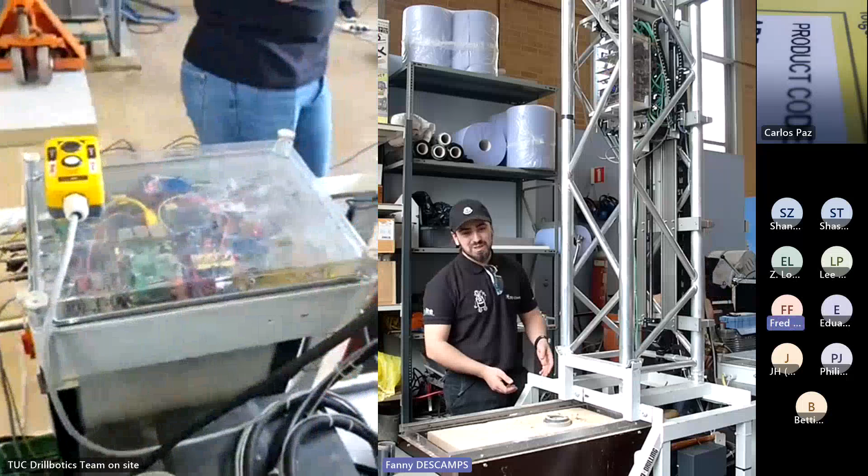This one here is really cutting the power supply. The one on the table is just stopping all modules, so we send a signal to all modules, and of course to the relay module. The relay module is also a module, but it's responsible for controlling the relays that activate the power supply. So basically, the relay module would then be told to cut off the power supply. But the hard cutoff is the red switch over there.

Good, if there are no questions for this part, I would head over to the displays. And I and Farouk are going to tell you a little bit about control and what we have for visualization going.

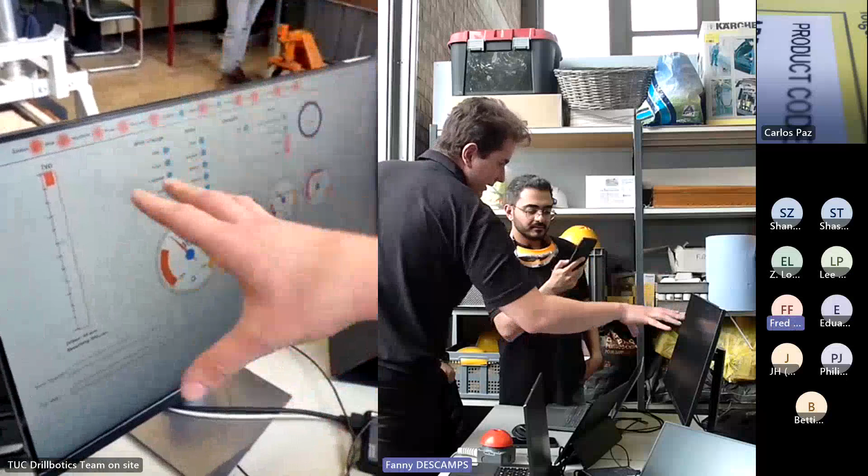Yeah, Farouk, do you want to start with the GUI? Yeah, of course. So we have our GUI, graphical user interface. Every data that comes from the sensor, from the machine, is being worked on and displayed here right now. Now the server is on, that's why we are seeing this slide.

Our server is accessible from any point around the world. Also the GUI and the control unit here, you just have to download it and make it running. We also have our graphs, but no data are being displayed right now because there's no movement, there's no data. We track hook load with depth, RPM, torque, pressure, hook load, weight on bit, rate of penetration, etc.

And next to the visual displays, we also have a logger running in the background. Since our architecture is decentralized, we can basically log in with as many devices as we want. So we decided to split most of the tasks into different clients. We also have a logging client, which is connected to the machine and logs all commands, data, everything that has a visit through the CAN bus gets logged in there.

But yeah, some of them are not very useful to log, some of them are constant or any kind of commands that we put in. But later for the data processing—Auswertung—yeah, for the data processing, it's very useful to see when somebody did something.

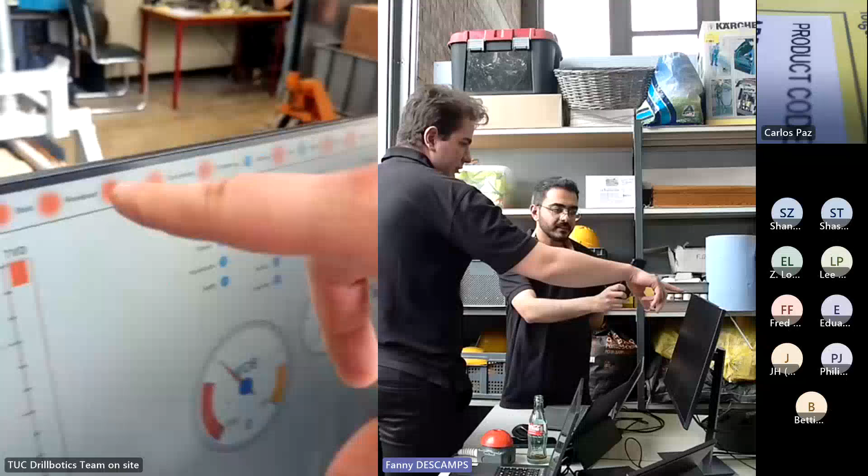So yeah, you can also mention what we have going over there with the lights. Yeah, now our modules are being displayed right now, and when the modules are turned on, they're red. When it's off, it's blue. So basically, when we lose a module during drilling, we get the signal immediately that something's wrong.

For the IMU, we have switched it off, since the IMU should be ready every time to just give out the data that it reports. And I won't lie, it's a little bit fragile. I mean, yesterday we drilled through the hole with it, we couldn't resist, we wanted to try the steering system. Yesterday was the first time we actually operated the wings during drilling.

And the IMU survived, but we figured it wasn't responding well to the constant pinging to the module, so we left it out. The drill string module is... oh, okay, yeah, the drill string module is not there. We have not implemented it yet.

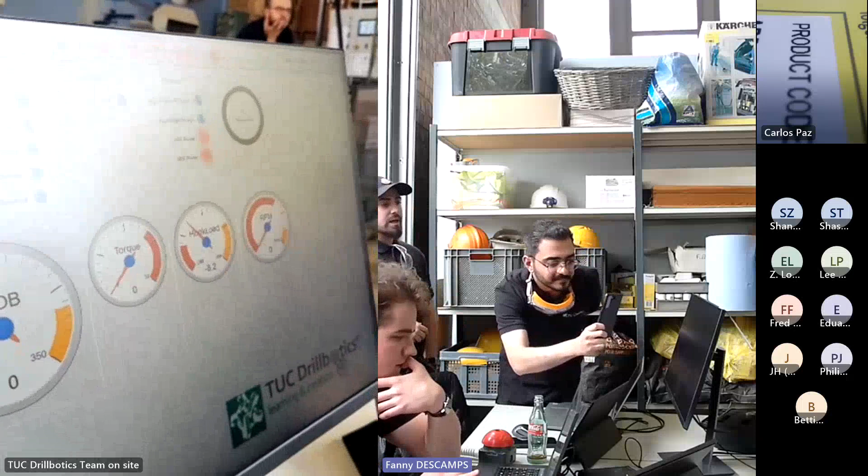Actually, it was planned to have the IMU mounted also on a drill string for drill string sensors, since the accelerometer can also be used for measuring vibration. And I think it also had the capability of measuring temperature, right? Yeah, so, but we have none left, so we couldn't do this.

Yeah, maybe just heading to the engineering interface, as I call it. It looked like this.

One question: if your pads don't deploy as you expected, what kind of feedback do you get? Is there something measuring the position of the pad, or do you rely on the next survey measurement to say I'm not getting the steering I need, so something is wrong with the pads?

No, we have two ways to know if the pad is activated or not. We have rotary encoders on the pulleys on the steering unit, so we can exactly measure the position of each wedge separately, and the motor.

That's pretty neat. On the Bowden cable we have a load cell, so we can determine if we are in contact with the inside wall of the hole or not. When we contact the hole, we measure the force with the load cell, and while steering we're pulling the cables with a constant force of 350 Newton. Okay, that's pretty neat, thanks.

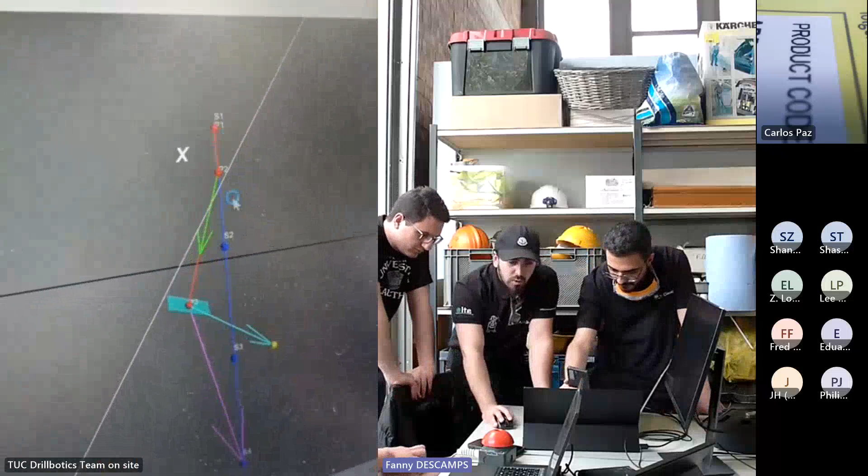In order to detect our actual trajectory, we would use the tangential method as stated before. So out of the azimuth and the inclination, we would construct a vector that we add onto the previous vector. Our first vector will hopefully be straight, and from there the algorithm would then use inclination and azimuth to construct the next vector in order to have the so-called BHA vector.

So this maybe looks a little bit off, but it will make sense when I turn it this way. The BHA is actually looking in this direction. So the plane that you see here is the tool face plane, and when looked from above—

This is also how we then use the steer, so how we calculate the steering force. When we look from above, we would take the next survey point S4 and project it onto the plane to get basically the target vector projection in the tool face plane.

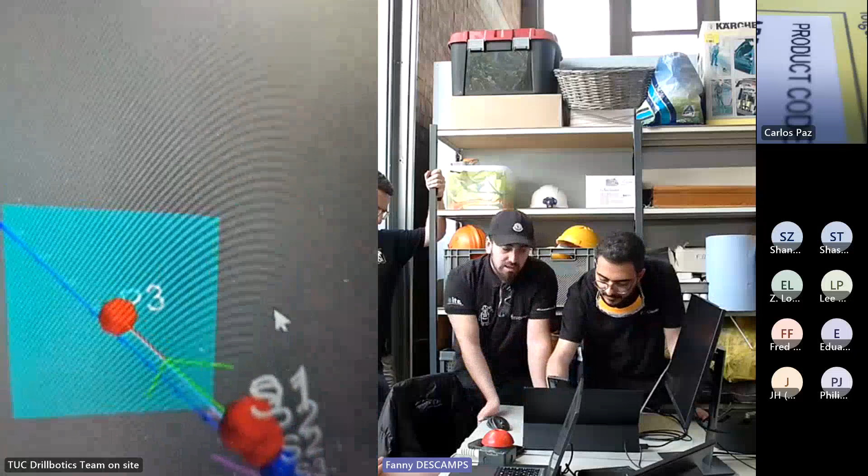So this vector would then have an angle and a magnitude, and we are only using the angle of this vector for calculating our pad forces.

So the target vector would be rotated by 180 degrees to get our force vector, and from there we split the vector apart, shown over here—okay, I chose a bad example, maybe I can zoom in a little bit. Matplotlib is not so nice sometimes, but you can see what is happening here.

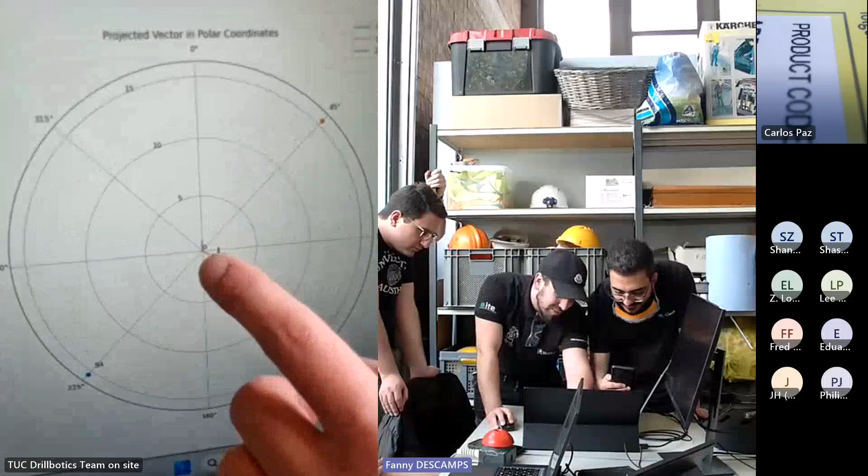We want to steer to that point, to S4, and if we flip it, the force vector would be somewhat around 45 degrees. This would mean that pad A, the blue small line, and pad B, the orange line, would have to be activated by that percentage in order to steer into this direction.

As I said, the magnitude is neglected here. We are just using the ratio from them. So we assign the target vector a magnitude of 1 and see what kind of ratio is between the two pads involved in the steering process, since we are only using two pads at a time to steer.

And this is then published onto the broker and picked up by the module, and on the module later it is converted with force conversion. We are using as much force as we are capable of doing without breaking anything.